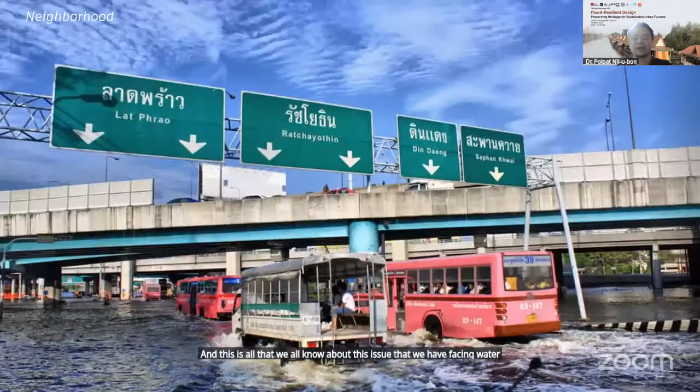Okay. Flood in Bangkok and also in Pathum Thani province, where my university is as well. This is the general flood issue in Bangkok, Thailand. We had a big flood event in 2011, and we all know about this issue, that we face big water every year, every time we have a monsoon. This is the big flood event in Thailand in 2011, and this is really close to my house, where the water attacked my house as well.

This is the time that we think resilience is important for everyone to be concerned about. Every city needs to discuss how the city can be resilient, and how we can deal with the water issue and other disasters. But we think if you use a normal approach, it's not going to work. We need to change a little bit how we think, if you think about being against water all the time. For example, the Netherlands already changed the against-the-water philosophy of the country. They adopted a new philosophy about living with water.

Now, even in Thailand, thinking about being against water is quite hard. We need to use a lot of money. We need to use a lot of technology to deal with this. Adaptation becomes more important for every city, how we can adapt, because we are not like China, we cannot demolish everything in the urban area. We need to change little by little. That means adaptation becomes more important. And there are some golden rules that help everyone see the vision. That means we have six issues that we need to be concerned with.

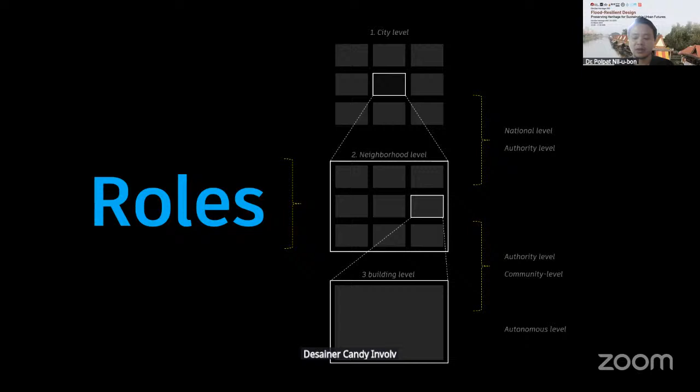And we have roles for this. For example, we start with the city scale level, where who takes charge is the national level, which needs to make a master plan and the vision of each city, like the vision of Bangkok, what kind of vision of Bangkok the government will design. This is the part of the level of the governments and authorities. And what about the neighborhood scale level? We have the local authorities, communities, and each designer can be involved. We need to involve this part, start with this, and then go to the government level later. What kind of large scale level does the government always deal with?

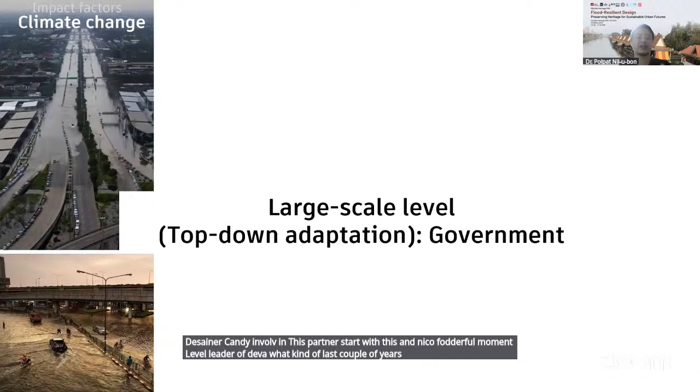We know climate change has a big issue with flooding, but we always know about the projects from the government side. A mega project always uses a lot of money. It's so expensive.

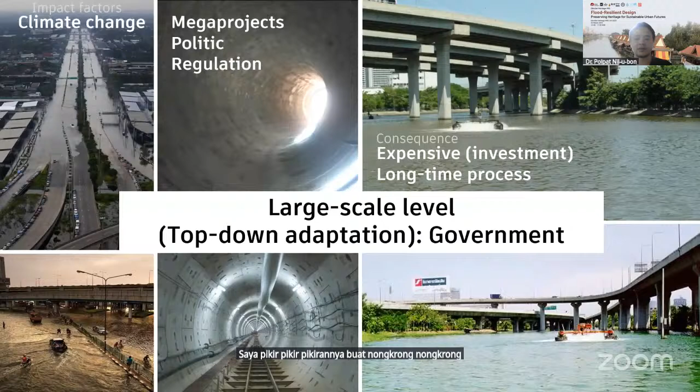You need to invest a lot of things from the governments, and also the process is quite long, right? The lead time is quite long, because they need to go to the court and they need to make another regulation. All the things really take so long. That's why the government's top-down level takes a long time and uses a lot of money.

And some of the buildings are elevated so as not to face the water. This is the problem. They can adapt like this, but the problem is still there. We call it maladaptation. Maladaptation does not solve the problem. The water is still there. We need to think about the whole system. This is important.

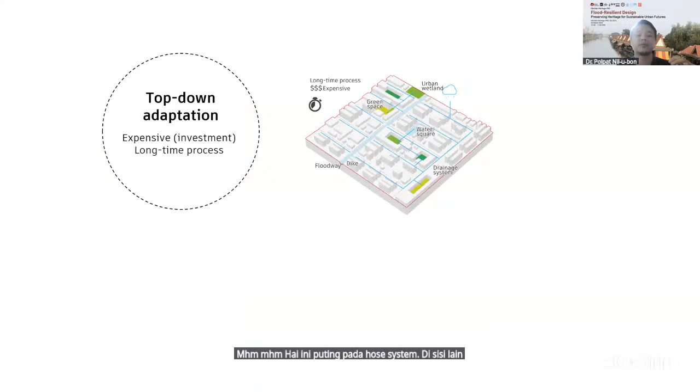Okay, the top-down level thinks about the overall, right? And the bottom-up thinks about individual housing. But for my approach, my research, we think about the middle, between top-down and bottom-up. We call it opportunistic adaptation. We try to make a group as a community, how to deal with this as a community, and make another approach to deal with water, to deal with the flood issue.

When they reach the end of their lifespan, they have the opportunity to adapt, to change their design, to integrate flood adaptation measures. We call this the opportunistic adaptation approach. This is the framework. We research the life cycle assessment method. We need to think about the age of buildings, the age of construction, and then we can see how to calculate this.

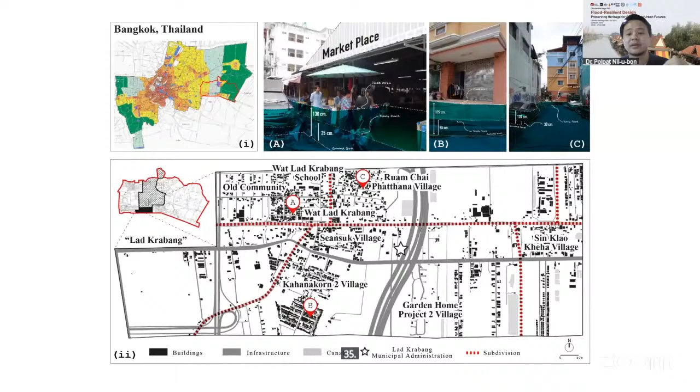Let's see a case study that I have researched before. This is a location in Bangkok, and right below it is really close to Suvarnabhumi Airport, the international airport of Bangkok, and there is always a flood issue in this area. The water level is about 1.30 meters high. And we use our method to look 100 years into the future.

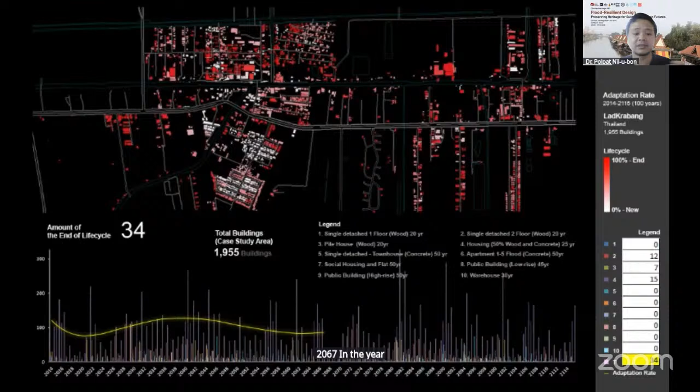We can predict when the end of the life cycle is, where flood adaptation measures can be implemented, when it's possible to do it, and how many buildings can be integrated. If you look at the simulation, if I stop here, in the year 2067, we can see 34 buildings reach end of life cycle at the same time.

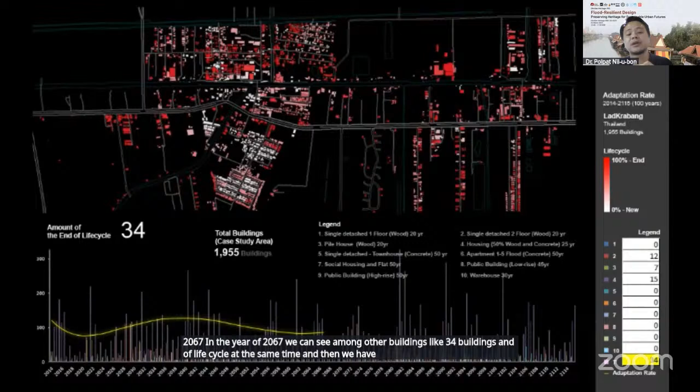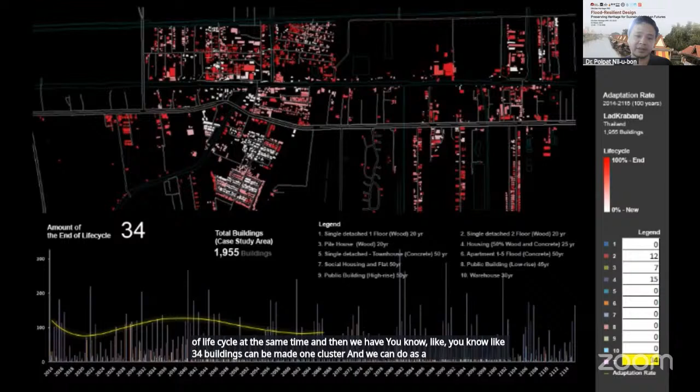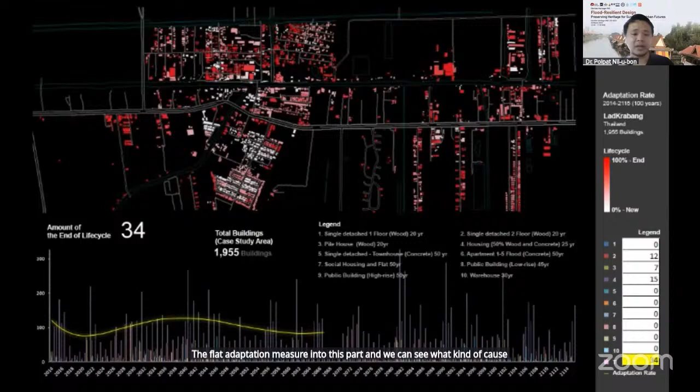So 34 buildings can make one cluster, and we can integrate the flood adaptation measure into this part, and see the cost and benefit for that community. And we can also see which locations are possible. If you look at this, the red is end of life cycle at the same time. Then we group them together, make one project, and integrate the solution.

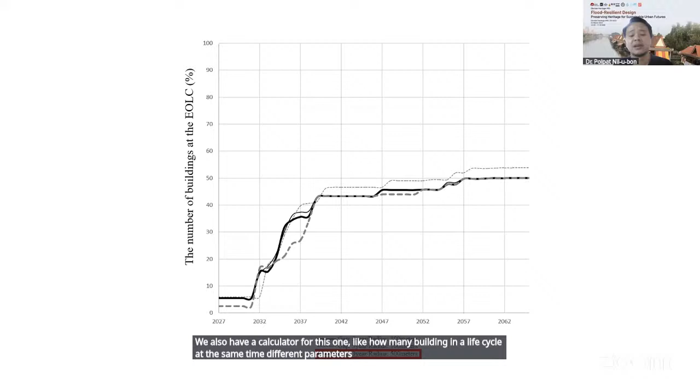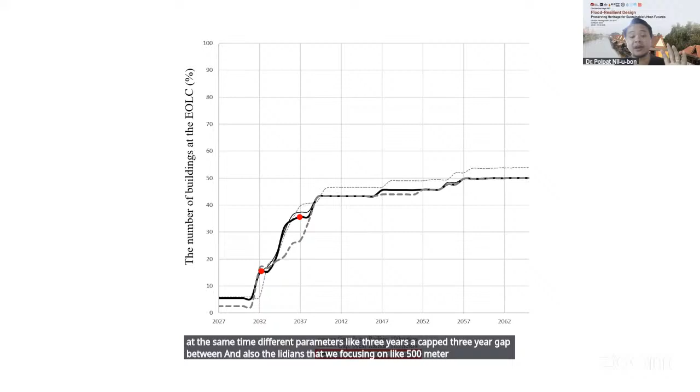We also calculate how many buildings reach end of life cycle at the same time with different parameters, like a 3-year gap, and the radius we focus on, like 100 meters. Then we can check how big the cluster of people that can work together is. This is the size of the area we consider. If you look at this graph, we can see 71% reach end of life cycle at the same time in that location.

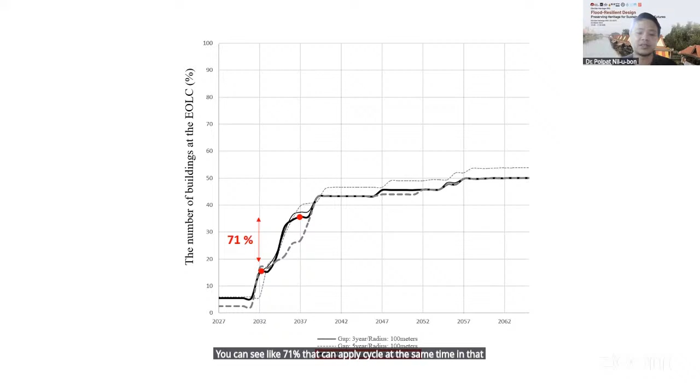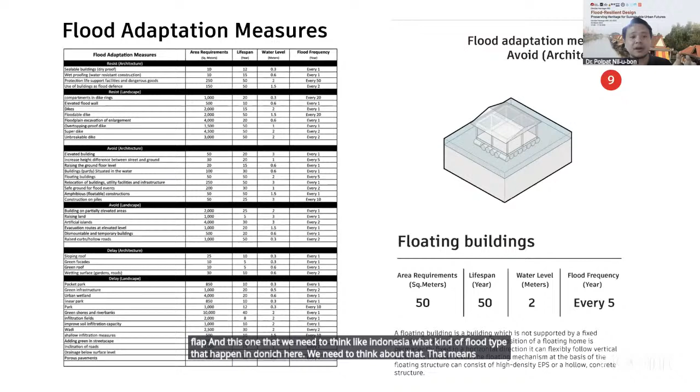And this is a mapping of adaptation opportunity that we need to define first, and we can see what kind of flood adaptation measure can be implemented on this one. As we all know, in Bangkok we have flood types like flash flood and river flood. And we need to think, like Indonesia, what kind of flood type happens in Indonesia. We need to think about that. That means it's going to be related with the flood adaptation measure that needs to be solved with

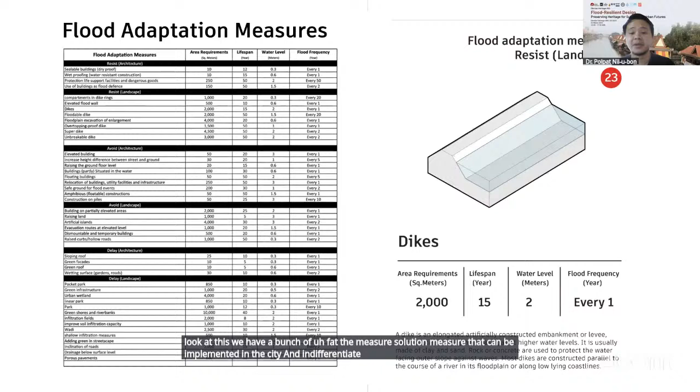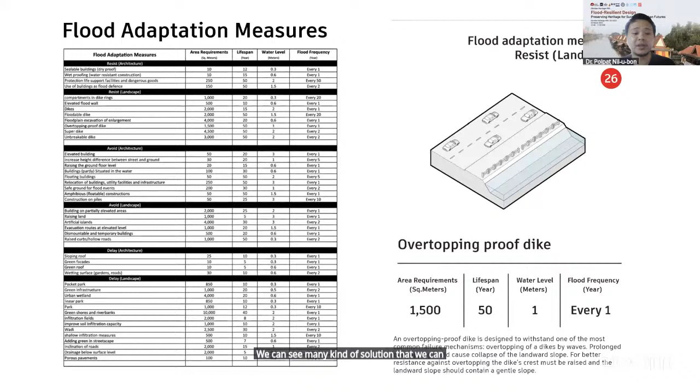that water issue. If you look at this, we have a bunch of flood solution measures that can be implemented in the city at different scale levels, like urban landscape and buildings and architecture. We can see many kinds of solutions that we can implement. We have so many solutions around the world, like hundreds of solutions that can deal with water issues.

But if we face uncertainty topics like climate change, politics, or urban growth, we need to think about another keyword. It's about flexibility in adaptation. We need to deal with this. If that solution is not flexible enough, then it cannot work with politics. For example, if you make one big dam, it's really hard to change to another solution compared to making just one water storage or one park. Compared to one dam, the flexibility in adaptation is different.

Just think about it: one dam is a really big structure. If you want to change, it's really hard to change to another solution. But if you think about a park, then it's quite easy. You can implement another solution more. This is more flexible than a dam. This is the important keyword for the next level.

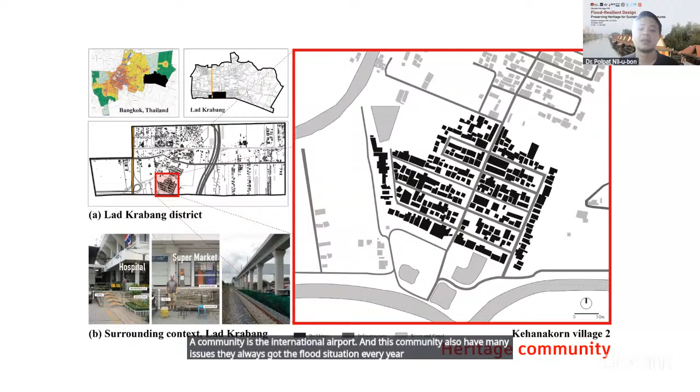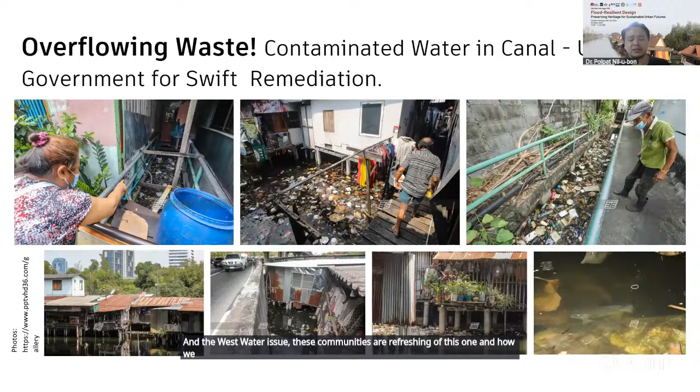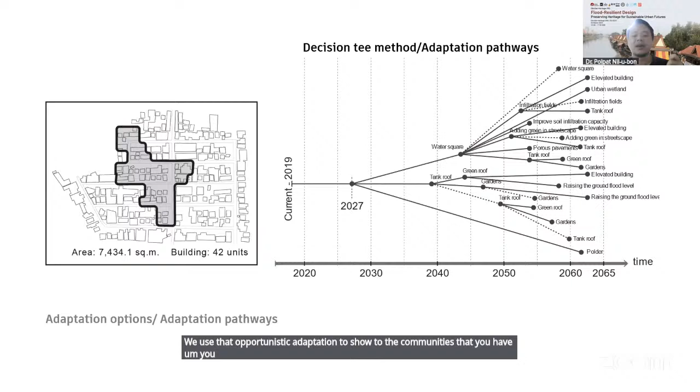Okay, if you look at this, what's wrong with the abandoned canals? This community has canals, and they really have issues with waste and garbage and wastewater. These communities are always facing this, and how can the government and also designers deal with this? We use opportunistic adaptation to show the communities that you have a time, meaning when you can implement and solve the flood issue, and we present the options for them, how many options you can implement in this area and in these communities.

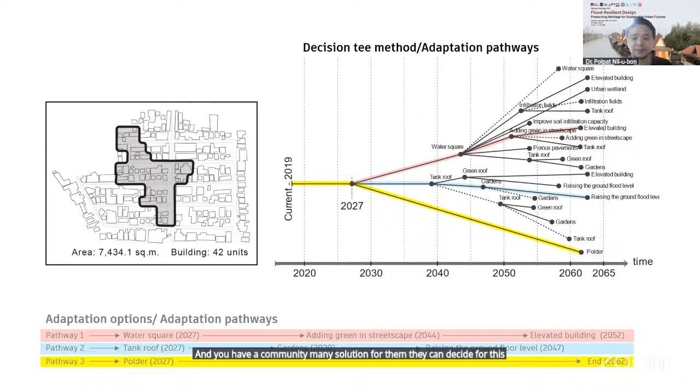We present to them that if you go for these pathway options, like pathway number 1, and when it's possible for you to implement, like if you go to Water Square, then in 2027, and then at the next level you can implement more like Green Street in 2044, so the community has many solutions. They can decide for this area, and then they discuss. Actually, they discuss and decide which pathway they will go for, finding the funding from the government and implementing it this way.

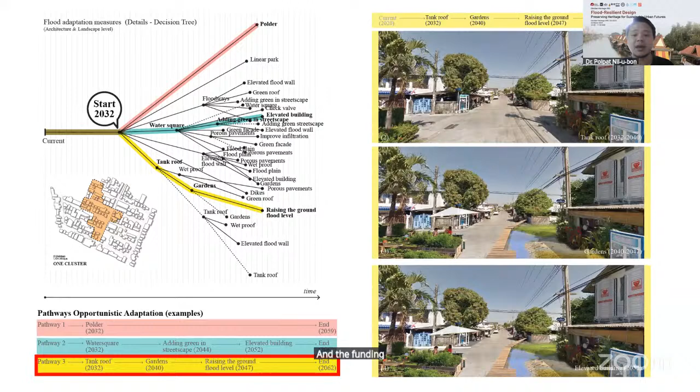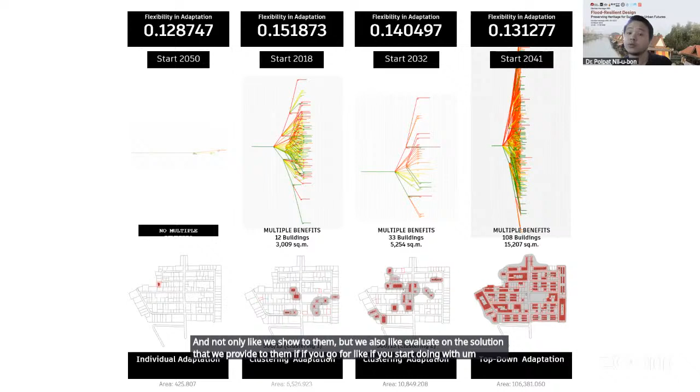And not only do we show them, but we also evaluate the solutions that we provide to them. If you start with 2018, you have really high flexibility. If you look at the number on the top, that number tells the community how flexible you are if you select some kind of scenario that you want to go to.

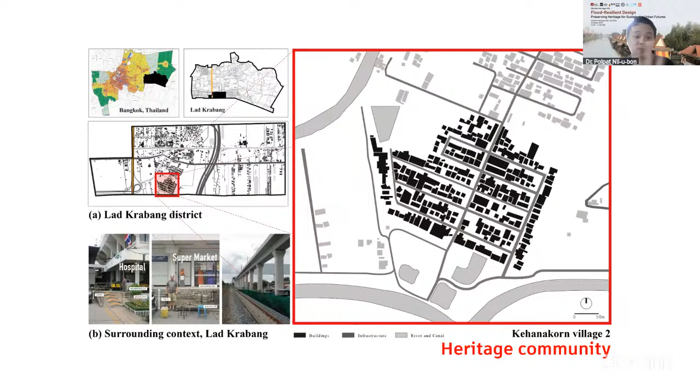We went back to these communities, and after we showed this, we thought about how we can communicate more to them. We made a workshop, and we went to the communities and discussed their pain points. They had three topics: the community, environment, and also public-private funding. For example, the community is lacking knowledge and awareness. This is all the things we tried to find in those communities, and we came out with another framework to make a digital platform, and to make this one

Okay, I'm sorry. Yeah, I'm staying in the office.

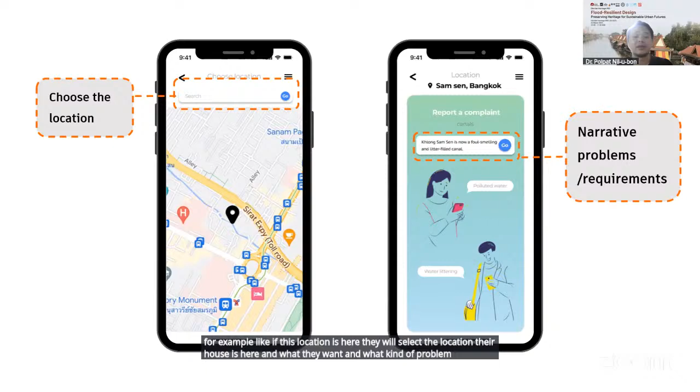And all the things, next, they can select what kind of issue they have. For example, if they want their community to become more environmental, they can select more. This application has a lot of data for that, data analysis in this way.

For example, if you look at this, they get into the application and see all the information they can select, and they also see strategies that they can deal with this. Moreover, they can see where they can find funding for this.

If they want funding, they can find it from the government or private companies that can help with this. This is how the application runs.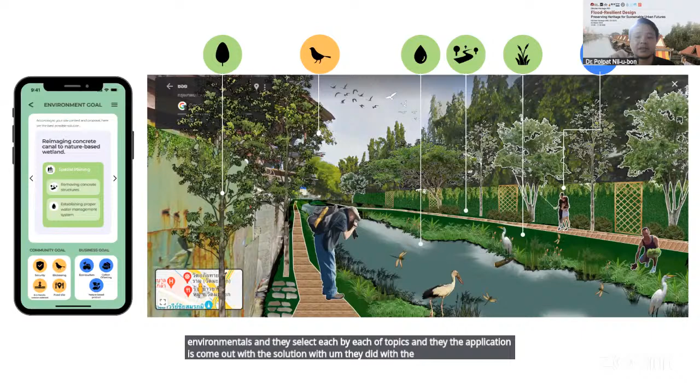We tested this in the communities, in the canals, and people select, for example, this scenario, focusing on the environment, and select each of the topics, and the application comes out with the solution and the identity that can be implemented in the canals.

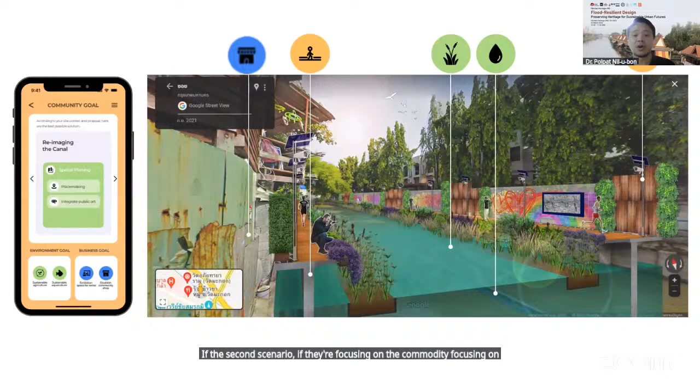In the second scenario, if they focus on the communities, more on things like retail shops, for example, it presents like this. All the presentations come from what the community is selecting.

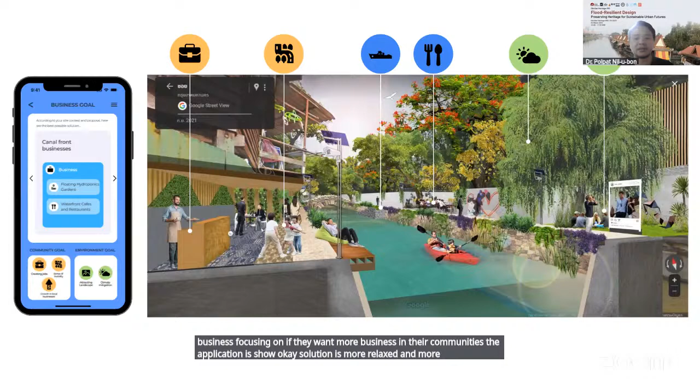Another topic is about business focus. If they want more business in their communities, the application shows, okay, a solution that is more relaxed with more retail and more activities that community can deal with. All the solutions come from the communities and people inside.

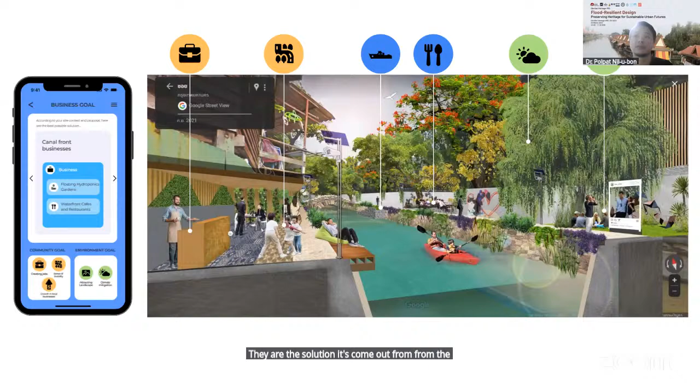Okay, the next topic is about flood adaptation measures around the world, so people can see how we can deal with this, and what kind of solutions are being discussed today.

The first example is from Copenhagen in Denmark. They have a retention pond, but we call it a detention pond. A detention pond is, when there's no flood or water, it can be used for activities, but when there's water, during the rainy season, it becomes a pond to store the water before it gets into the main drainage system.

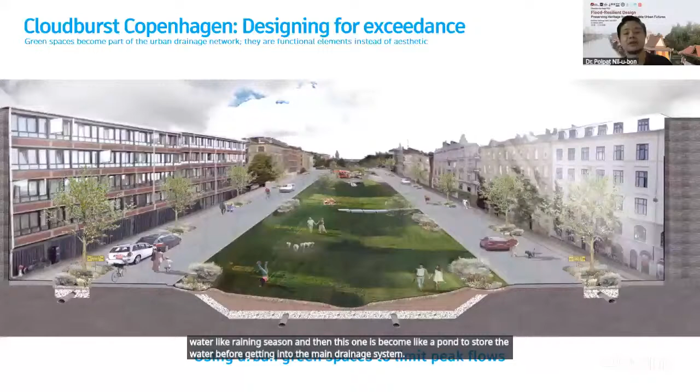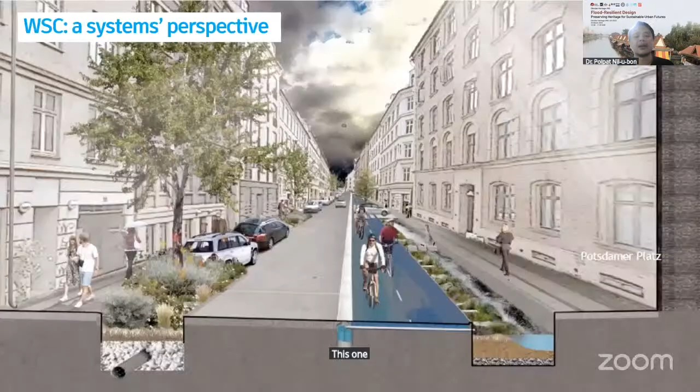This one is the big floodway in Copenhagen as well. When there's water, it will pass from point A to point B. Okay, and some more examples from Copenhagen, Denmark.

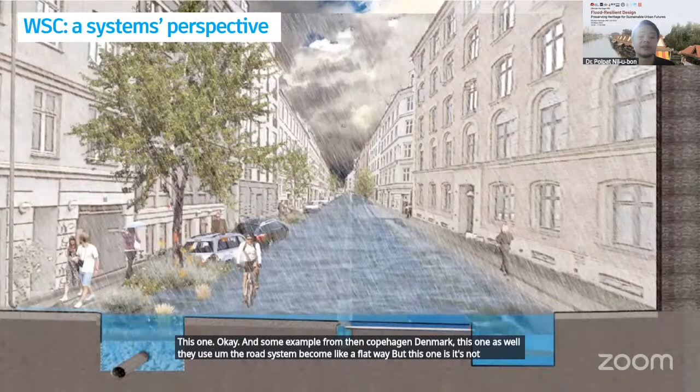This one as well, they use the road system as a floodway. But this is not suitable in Thailand; it's not allowed here.

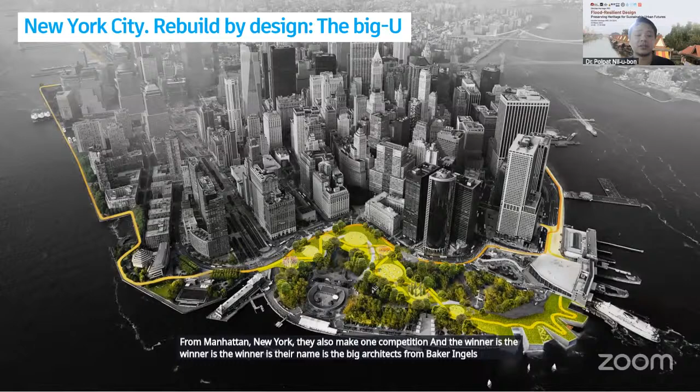And this case study is quite challenging, from Manhattan, New York. They also made a competition, and the winner was the Big architects firm from Bjarke Ingels, and they won this competition. Then they tried to make a solution that could be implemented over different years.

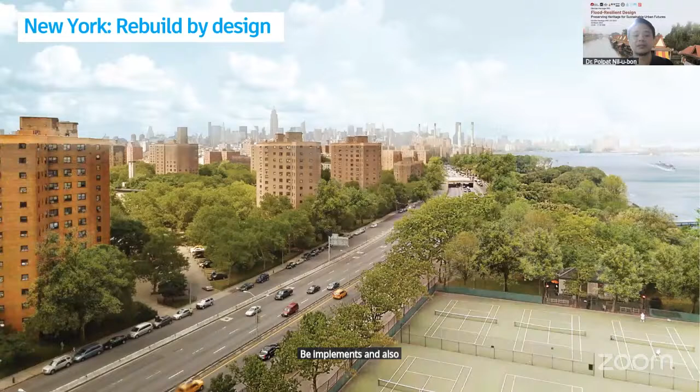If you look at this, for example, in the first year, how they could make a difference: first they made a flood dike system across those cities, and they tried to make pathways to connect inside the city.

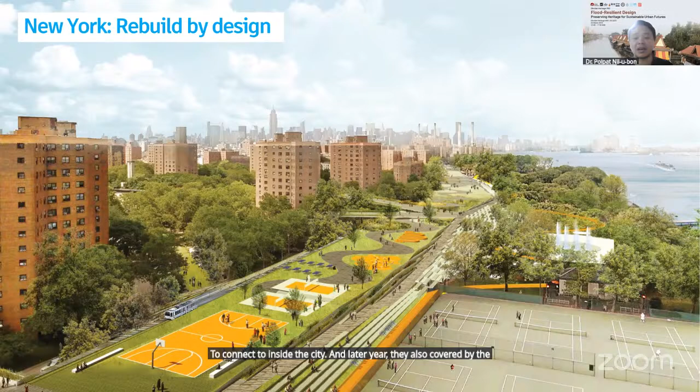Later, in following years, it was also covered by the landscape and transportation over the road system. Now New York has become a green city and a green-blue city, with less of a road system. This case is really interesting.

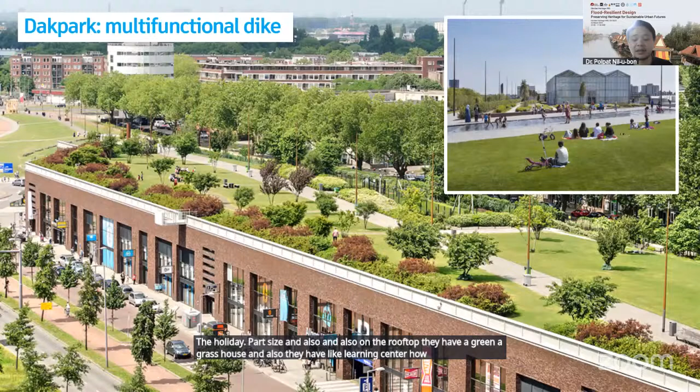This is a case in Rotterdam, a heritage port community. This is a project where they make a big dike integrated with a shopping mall. If you look at this, this is a shopping mall, and this is also the dike system, really big one - we call it the super dike. The super dike integrates with the flat, integrates with the shopping mall, and this tries to also protect the heritage port sites. On the rooftop they have a green grass house, and also a learning center where children can learn and people can relax on the rooftop.

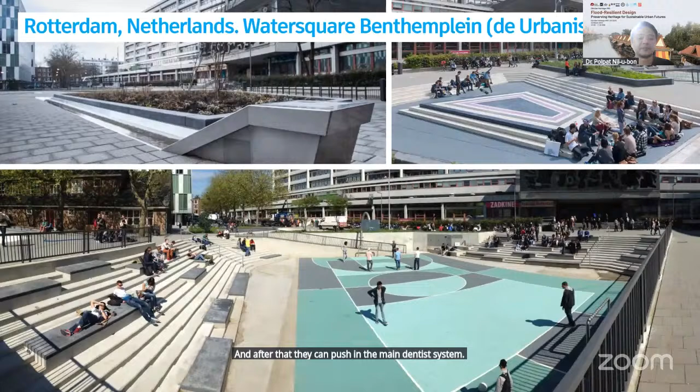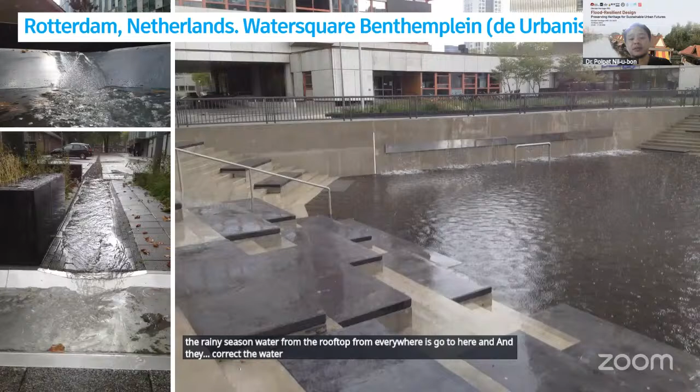Another project in Rotterdam, Netherlands - we call this one Water Square. Before, it was a normal plaza with no more activities, and this place allows all the buildings around it - this case study is education. They try to make a pilot project, an example that water can be stored in this part, and after that it can be pushed into the main drainage system. During the daytime, this area can have more activities, but during the raining season, water from the rooftop and from everywhere goes here, they collect the water in this part, and afterward they push it to the main drainage system.

But the interesting part of this project is about how they communicate with the communities. They have so many workshops, so many times making workshops - they have like 3 to 4 sessions before they get to the final project.

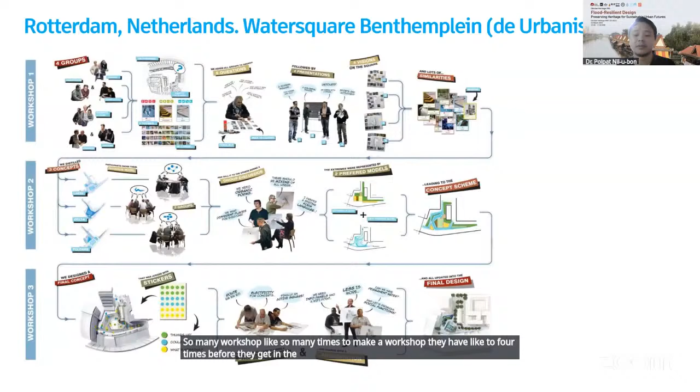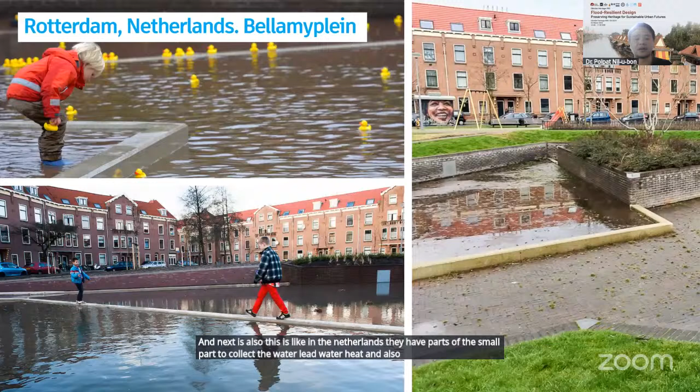Next, also in the Netherlands, they have a bunch of small parks to collect water, reduce water heat, and also help the new generation learn about water and love it, while also reducing the heat island effect in the area.

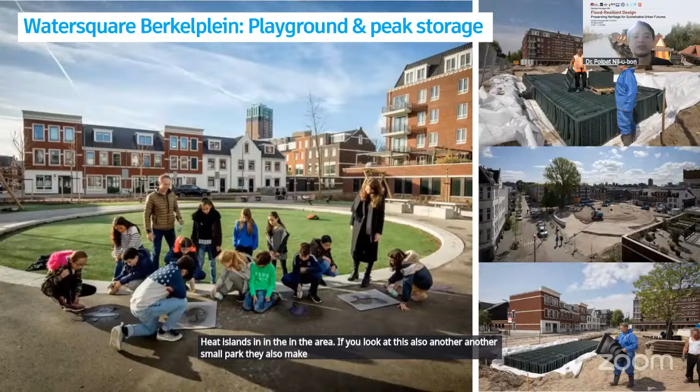If you look at this, another small park, they also make underground water storage - we call this one a water box. This one delays the water before it gets into the main drainage system, and implementing this has helped prevent flooding in this area.

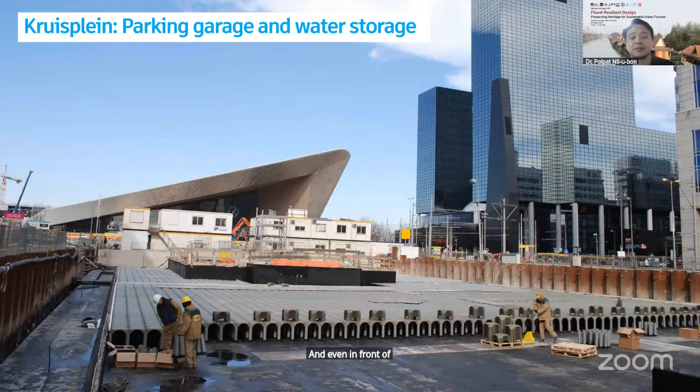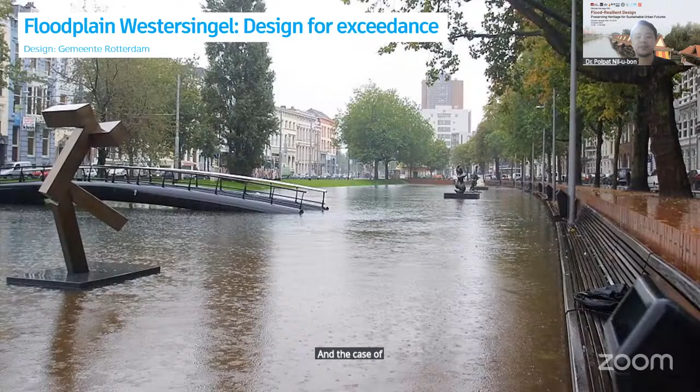Even in front of the Rotterdam train station, they also have a water box underneath, but on top of this one is a parking lot for this project. And in the case of this pond, they also have a big plaza - when water comes, this one becomes a retention pond.

Now we go down to more like landscape and architecture level. We have water storage under the pathway. And this one is more architecture - we have a green roof to delay the water before it goes down to the road system.

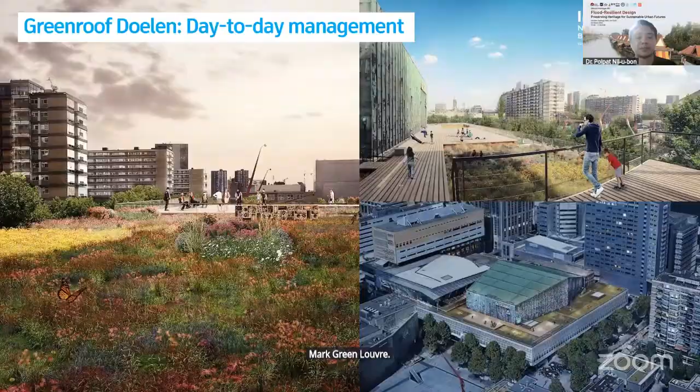More green roofs, more other projects. And also this one is really nice - the water comes from the rooftop and gets into the pot. People walking past this building normally just use this water, and it's also very fresh and really clean, because it goes through sand and tree filtration.

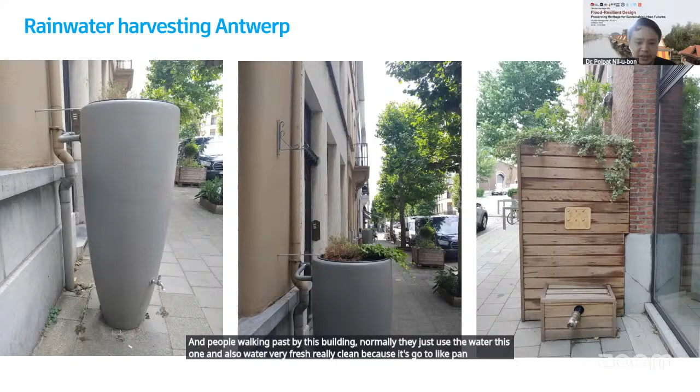We see more about the flood adaptation measure types, how many types exist around the world. We have, for example, elevated buildings and land - this is one type. We have resist types, like dry proofing for heritage buildings - we can use this to protect the building so water doesn't get inside, without demolishing the buildings. We also have wet proofing, like painting with certain colors and doing this.

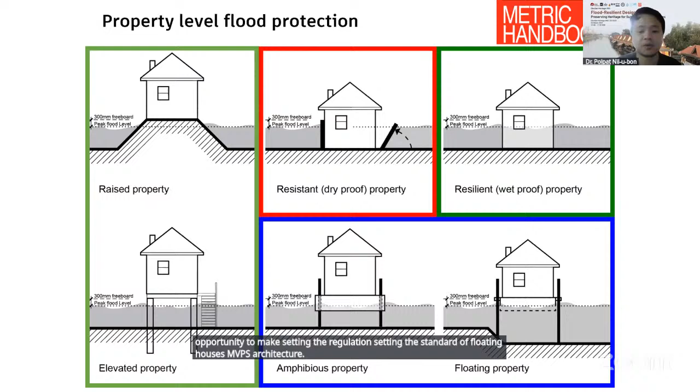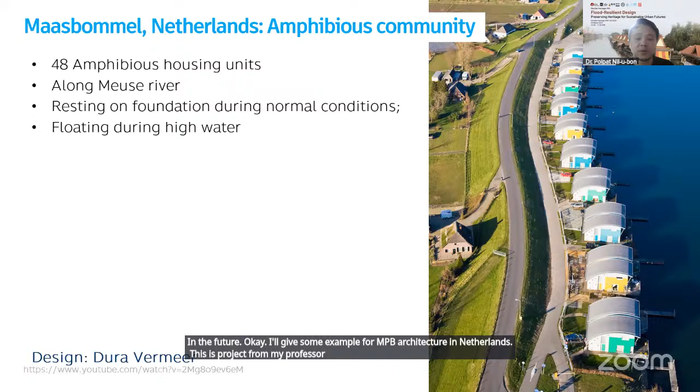I will give some examples of amphibious architecture in the Netherlands. This is a project from my professor, who was working on these projects called amphibious architecture. When it's dry season, the house is just on the ground. But when it's raining season, more water lifts the buildings, and the building is now floating. This is really more resilient and more flexible.

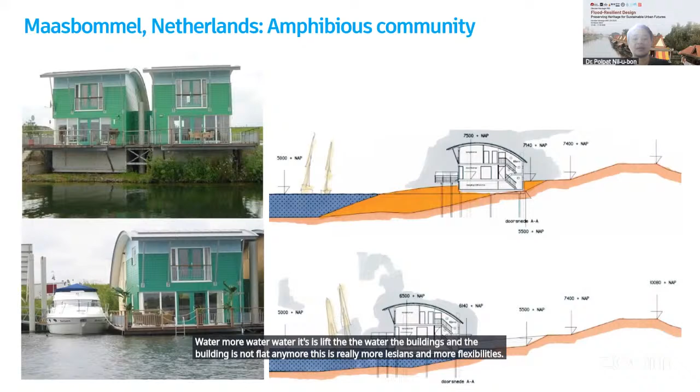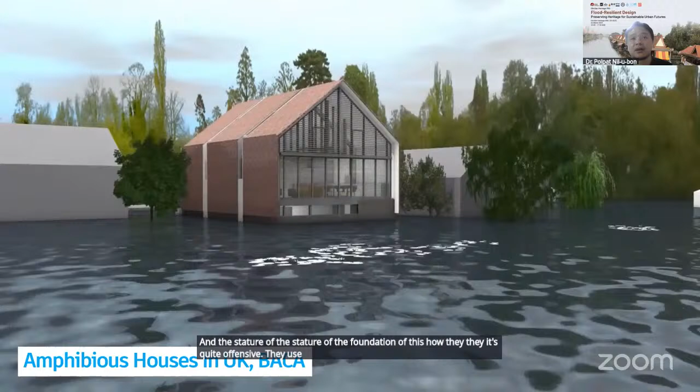For example, this case study in the UK was designed by BACA. This company makes amphibious architecture, amphibious houses, right next to canals. When there is more water in the canals, they lift up the house. The structure of the foundation of this house is quite expensive - they use concrete combined with foam EPS.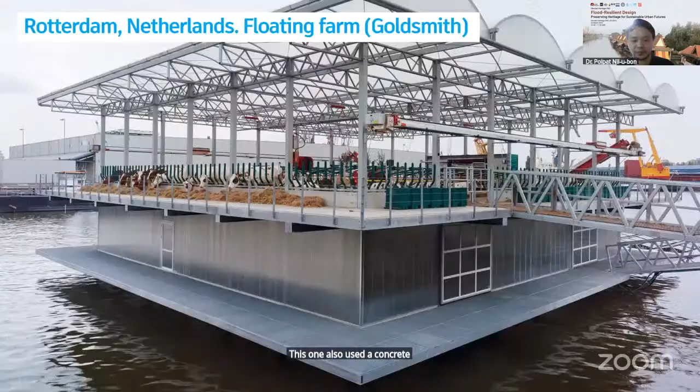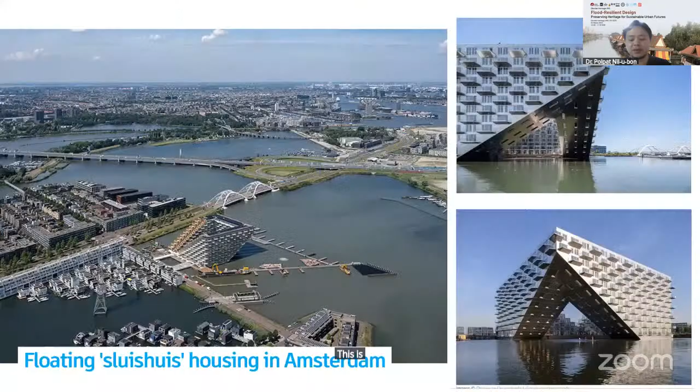And floating farms - some case studies are also possible to make. The interesting thing about this project is about how they clean up the water from the cows. This is how they can deal with this, because otherwise they will put the water into the canal, which is not good. But this was really a challenge for them, and they succeeded with this project.

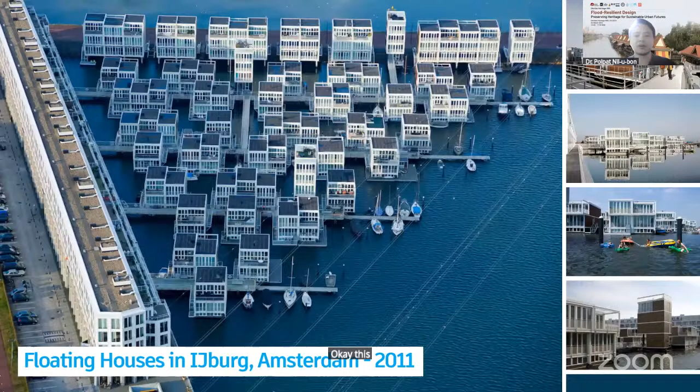Another case study from Amsterdam, made by BIG, a big architecture firm. They integrate both elevated buildings and floating buildings. This one also has a big community combining floating buildings and elevated buildings in one line, becoming more large scale with floating cities.

This city is not new - it's also a heritage site. They try to preserve the center, but all around they try to make it floating and deal with the water in the future. This is also one of the case studies that is really nice.

Not only the city in the center, the community in the center, but if you look at all the urban wetland around this one - not only water management, but also cleaning water, making wastewater into really clean water, and generating energy as well in these villages.

The last one is an emergency message that I want to challenge all of you with, because right now in Thailand it's time to redesign our delta. We are not really sure that we are working well for our delta, but we are asking our government and all the local people that this is time for redesigning the delta bank in Bangkok or not. This is like an emergency message that we have to act on now, otherwise it's going to be really suffering.

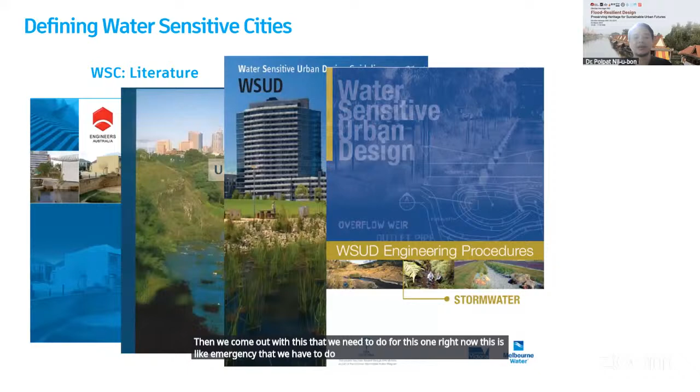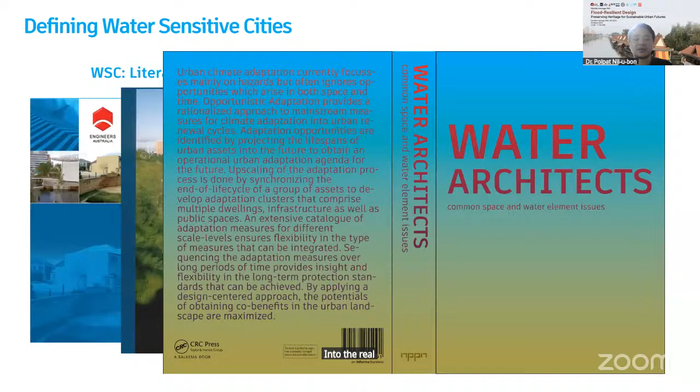A little bit about this based on my research and knowledge - I have published one book called Water Architects. This book is about a catalog of solutions, and also some examples that we implement into real projects in the real world. Inside the book there are a bunch of solutions we can deal with this.

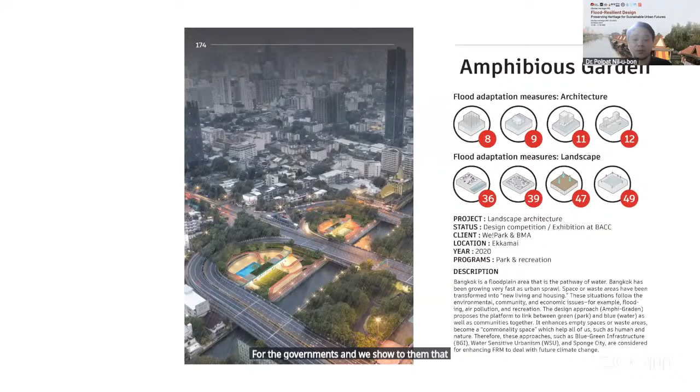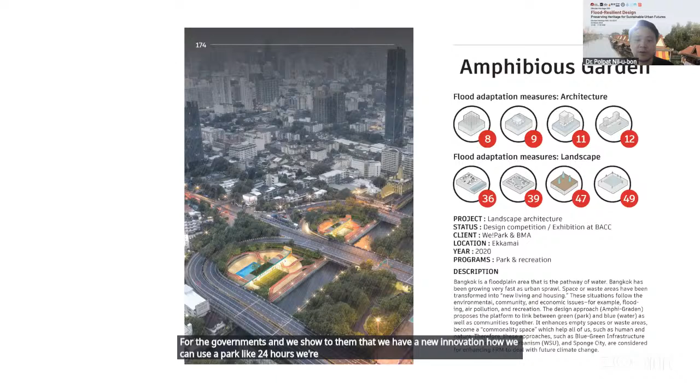We give some examples, like one park for the government, and we show them that we have a new innovation for how we can use a park 24 hours. We're making an amphibia platform - we call this amphibious garden. It's like a big umbrella to let people use the park 24 hours, because in Bangkok, when it's raining, we cannot use the park since Thai people don't like rain. They normally go into buildings like shopping malls.

But if you make this amphibia platform become like a big umbrella, people can use underneath this platform. What we provide is a new platform people can use - not only amphibia floating up and down, but underneath the platform they can have more activity.

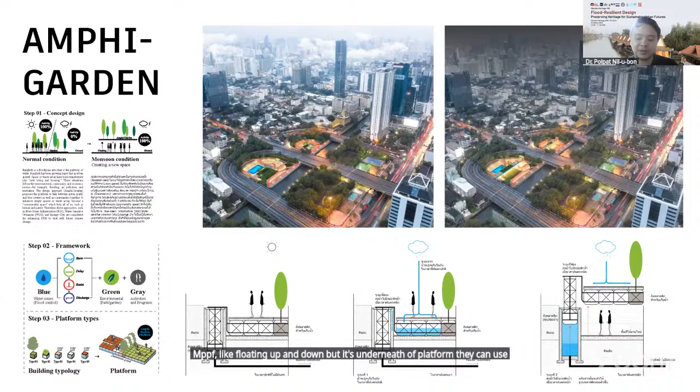I will show you how it looks. This place is right next to the canals - transportation canals - and we have issues with river flooding in this area, which is why the government needs to manage and renovate this park more. We showed this project to them: it can be one big platform, and when it's raining season, this platform will be floating, with more activity happening underneath.

Okay, let's see for this one.

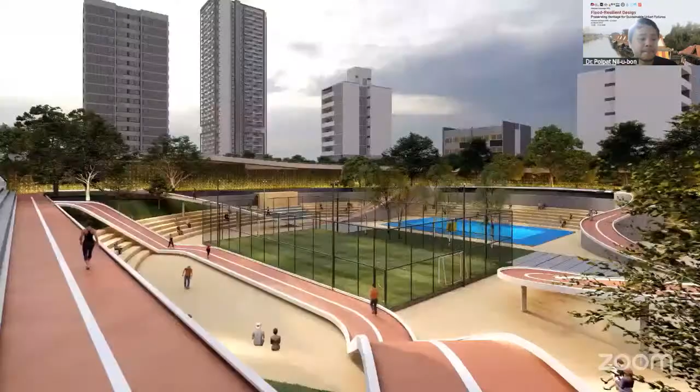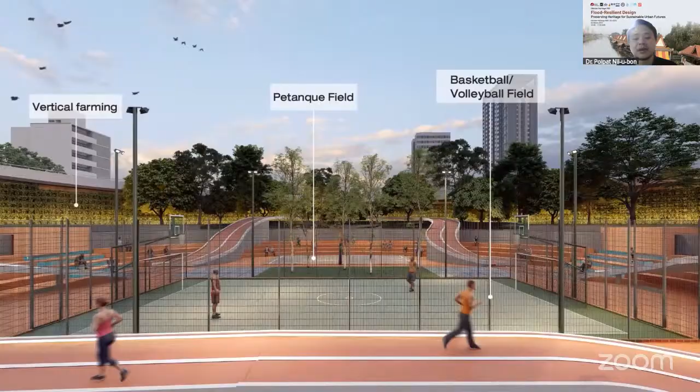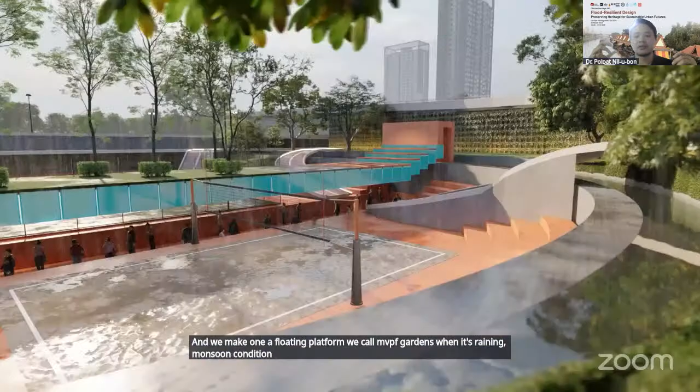Yeah, this is a park. Before it was a really abandoned park, and we made a new spot for these communities, and we made a floating platform we call Amphi-Gardens. When it's raining, in monsoon conditions, this platform will float. It's floated by water from the side of the canals.

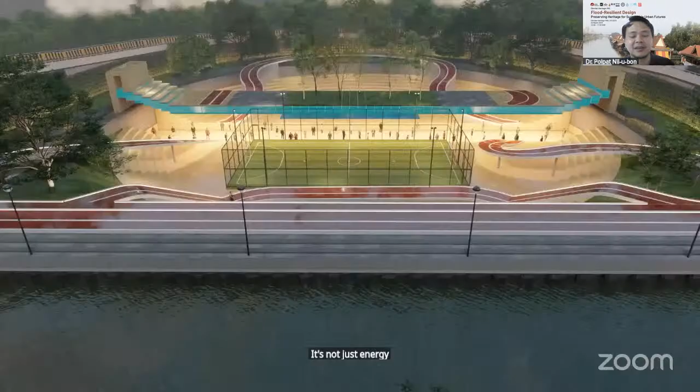It doesn't use energy from other sources like electricity. No, we use only the water from outside. Yeah, this one will become a floating platform. Okay, yeah, that's it. Is that too fast, right?

No, it's okay. Thank you very much, Achan Polpat. I do appreciate all of the knowledge that you are sharing with us and your experience regarding this flooding. Okay, then, all the audience, we will go into the second part of this event. I would like to open the question and answer at this time, and I have a place in the chat column if anybody would like to ask something of Achan Polpat. But before that, I would like to give questions to Achan Polpat.

So, Achan Polpat, regarding your experience with the floodings in Thailand, what exactly is the most important thing that a community should have, especially communities that live on the riverbank? Is it clear information, or other knowledge that the community has, like here in Solo, when we ask the community, do you know when the flooding will come?